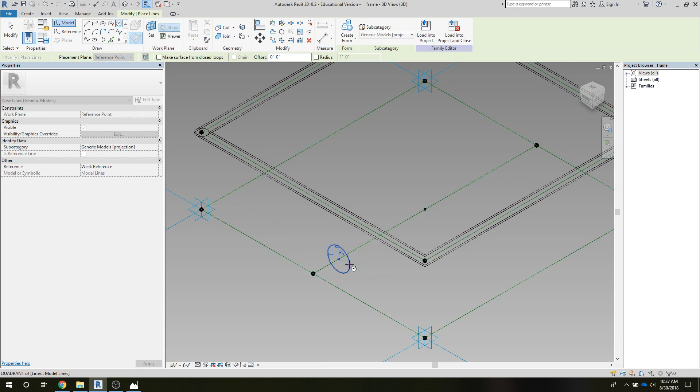I'm going to put in a tube right away across the bottom here. So I'm going to place a point on this line. I'm going to set its reference plane. I'm going to draw a circle again. I'm using tubular componentry just because it's really easy to quickly construct. I'll make a 12-inch diameter tube, so that's relatively massive. I'm going to grab the reference line and the circle, create form, and we've got some solid form going across. And I see that kind of as a major structural element.

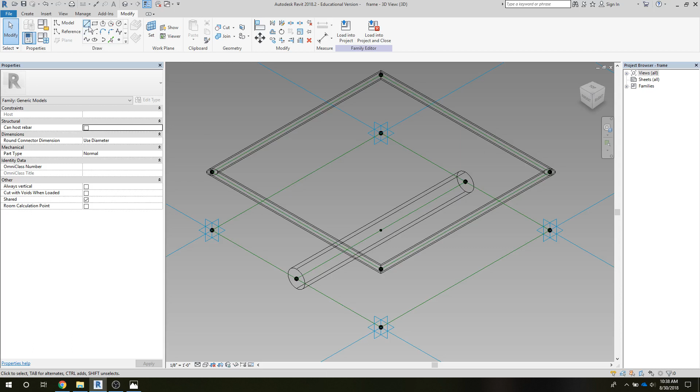You can do this any way you want. You'll see how the thicknesses play out in characterizing the way the truss actually appears visually and the way you see the structure working. So let's create a couple more reference lines. I'm going to triangulate these points now, so I'm going to connect some points. These are the triangular elements.

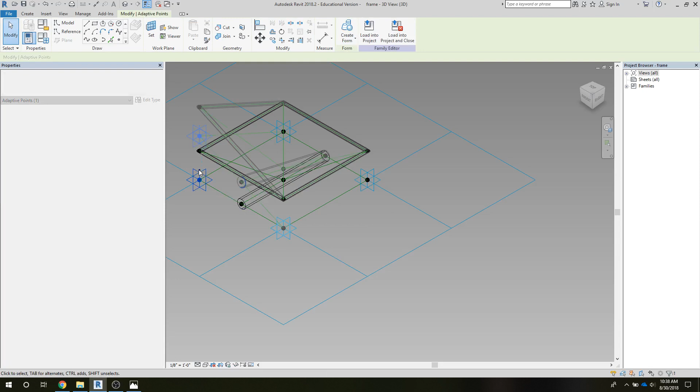And let's go ahead and test our functionality. We want to move these and make sure that our lines are all behaving properly, which means that they're behaving adaptively and we're not getting any warnings coming up. As you go through this, you'll probably find that you are getting some warnings, so don't get the idea that because I don't have warnings or problems coming up that you should be having the same experience for the first time through.

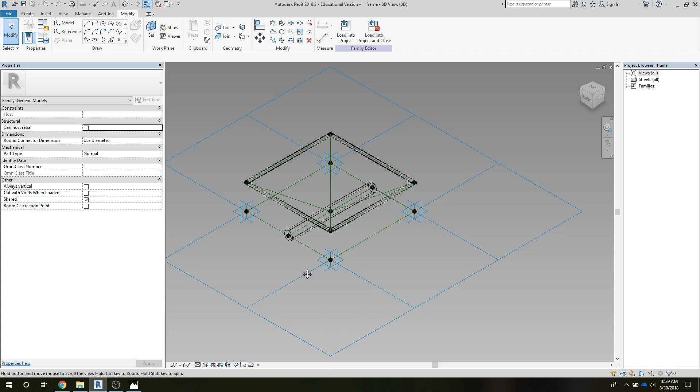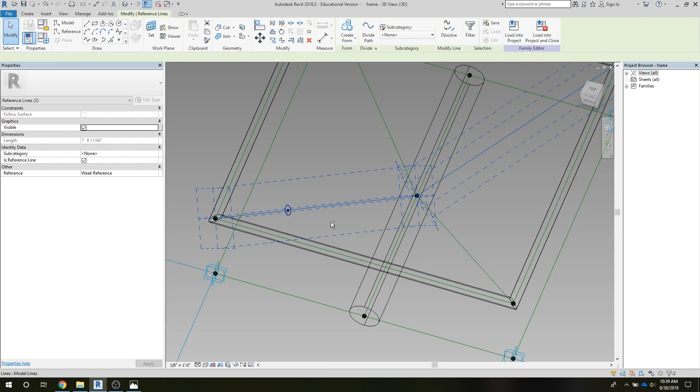Now we're going to make some more tubing along these elements. In this case, sometimes just rotating the geometry can help you visualize things better. I'm going to put a point on this line, and we're going to set another reference plane, and we're going to draw another circle. We'll make this a 2-inch tube. And we can actually extrude out geometry in multiple directions as long as the reference lines are contiguous. So I'm going to select those two reference lines and the circle and create form. And I'm going to also do the same thing in the other direction.

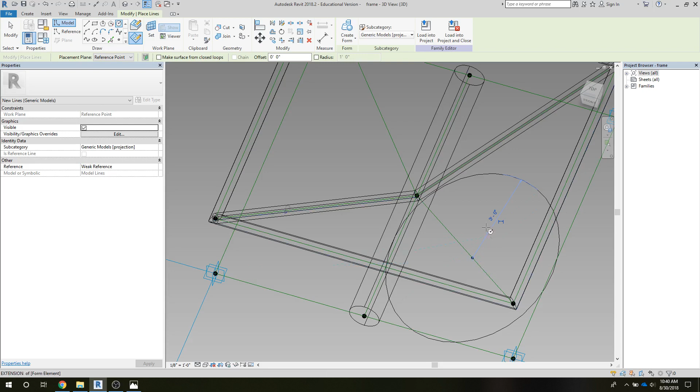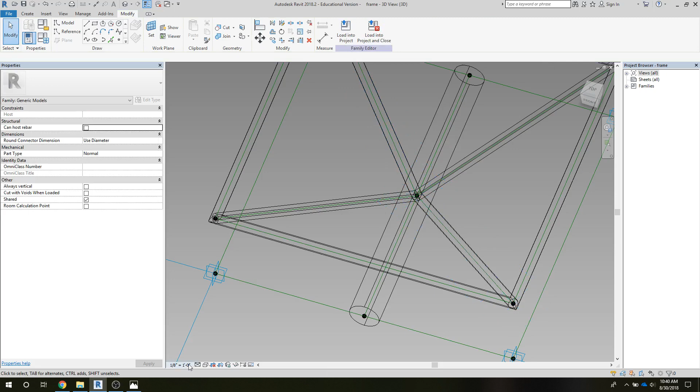I'm going to have to put another reference point on there, set another reference plane, and draw another circle. And we wanted that to be, I believe it's 3 inches. Oops, not 3 feet. I think it was probably 2. We'll see in a second. And I'll look at that as a shaded solid just to see how it looks.

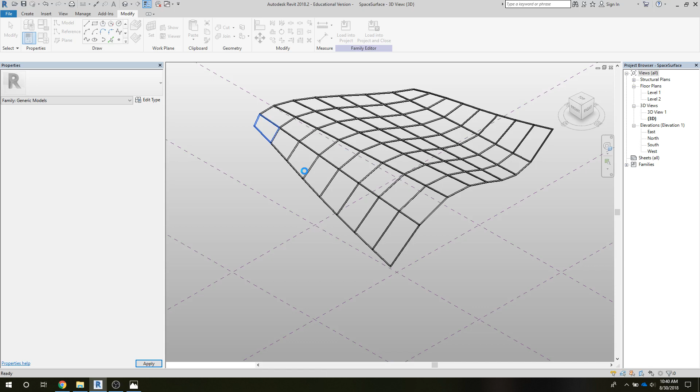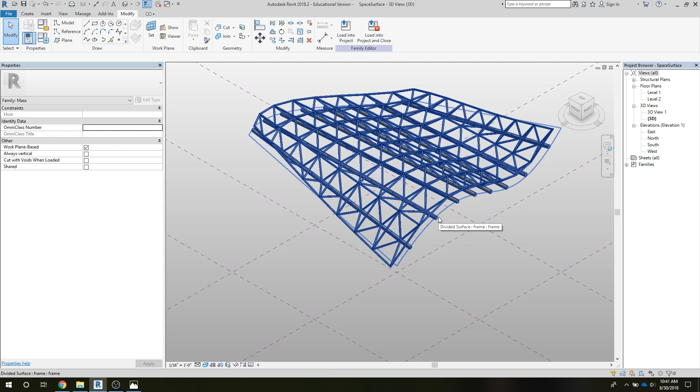Okay, so now we've created a new piece of geometry, added our components. We'll go right through and load that back into the project again, and we'll overwrite the existing. Give that a minute to regenerate. And there we have our truss. And like I said, I made those bottom tubes really substantial just to help you visualize the way that the frame is constructed. You can also imagine those as being attachment points for structural column systems that we're going to add later on.

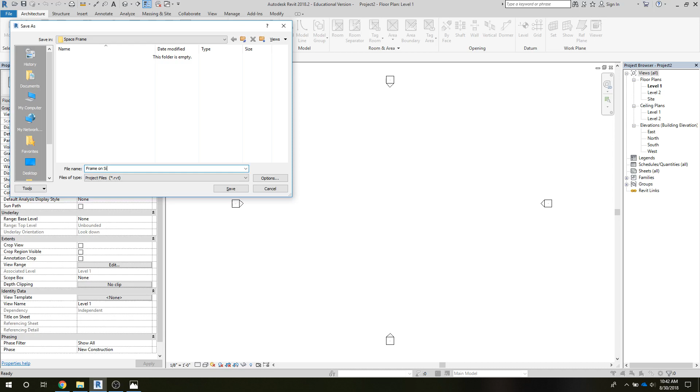Now we've completed this, but we're in a family environment, and we really want to move this into a project environment. So let's go ahead right now and open up a new project. We'll go ahead and save that right away as, I'll call it frame on site. And we'll go back out to the space surface file. And we're going to load that into the project now, onto our project environment. So this is the first time that the frame is sitting in our actual project.

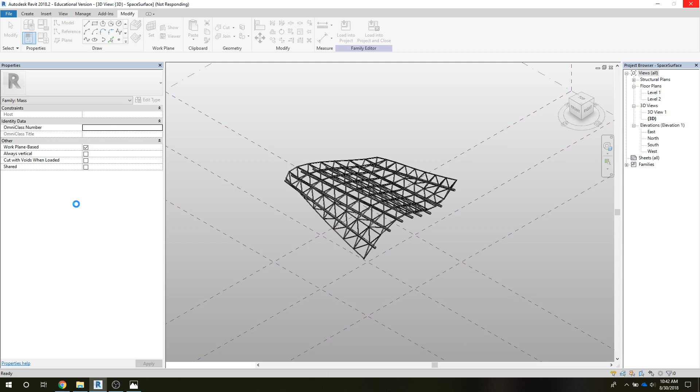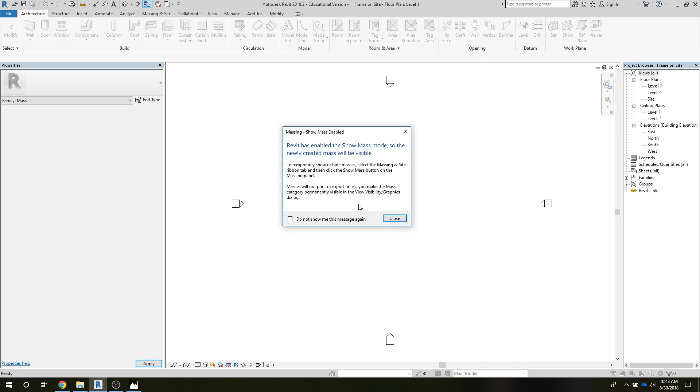Not quite sure why I have such a long lag time there. This always comes up: show mass. Because we haven't added materiality and we have some conceptual mass elements in there, it typically shows the mass the first time you put it in, but many times later on you reopen the file and the mass elements don't show up because the mass visibility has been deselected. So this warning is valid, and if you ignore it, you'll probably find some confusion later on. And I'm going to just place that element by clicking now and give it some time to regenerate.

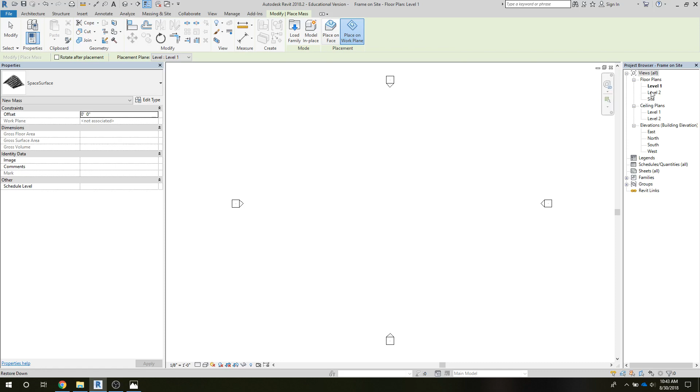That warning is once again about the mass geometry, and we're not seeing it because we're at level 1 and the actual space frame is up higher than that. So let's just create a generic 3D view here so we can see it. Now we can see our frame has been inserted on the drawing. And let's go to the south elevation just to see how high we're sitting. So we're at 0, we're up at the 40-foot range.

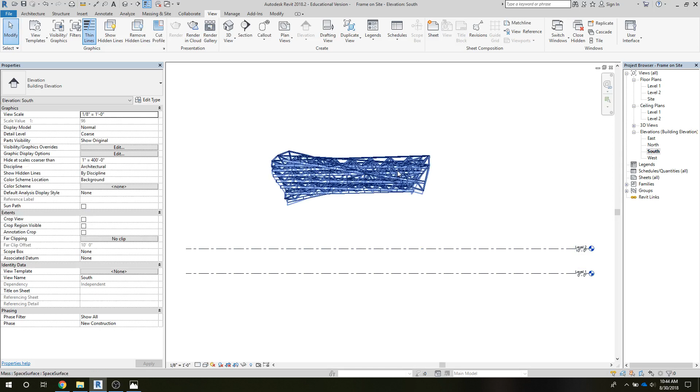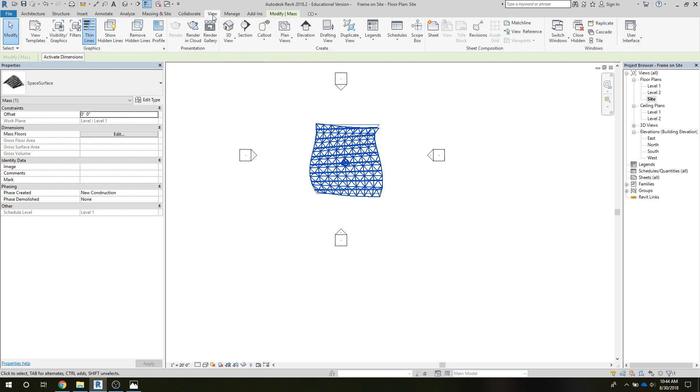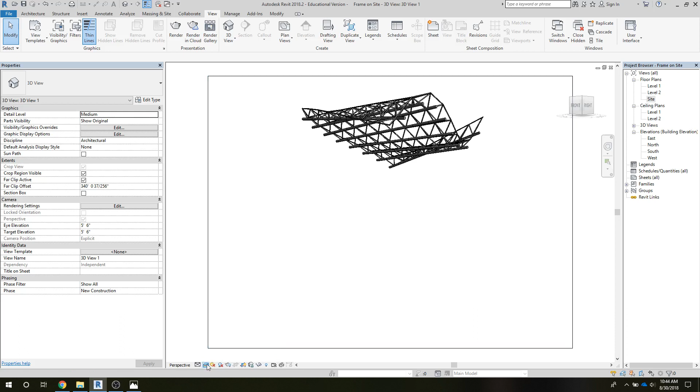Let's go to the site view. We can see our system. I'm just going to move it over a little bit. And before we leave this clip, I'm just going to create a 3D view of it. So I'll go and grab the camera. It looks a little odd because we don't have any kind of ground plane to help us see it better. Actually, we could render it, get some ground plane in here.

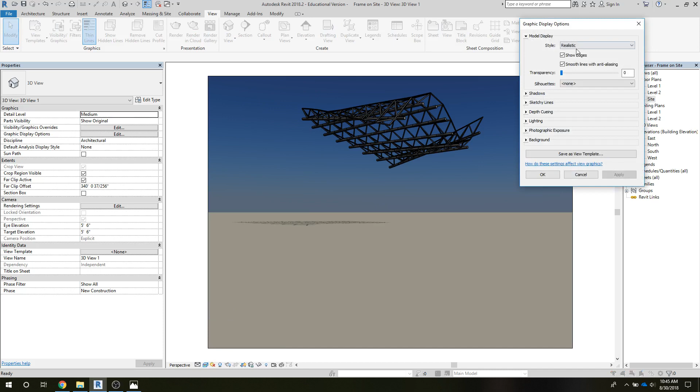All right, and because the frame has so many lines in it, let's turn off the lines so that we just see form. Okay, so we'll leave the construction at that for now. I'm thinking that I might want to lower the whole space frame down because of the scale. I'm 40 feet in the air, I'm really only 60 feet wide, so maybe we want to do a little adjustment there. But that's not critical to moving forward with the project. So we'll pick up on the next clip with starting some columns to support this.